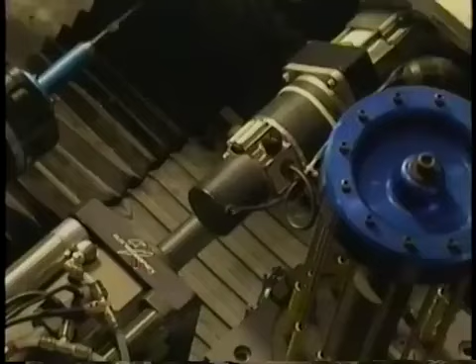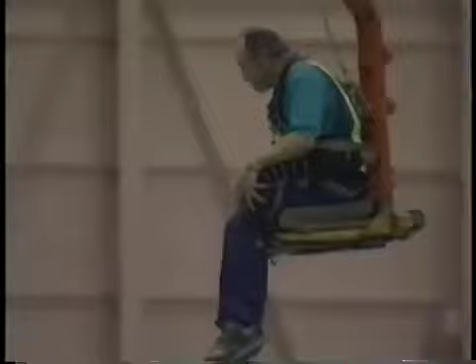It would be one of the most complex machines ever built. It would take 10,000 people and nearly 5 years to build it. It would cost an estimated $5 billion.

Success was anything but certain. The plane would contain more than 4 million parts supplied by contractors around the world.

But would they arrive on time? Miss your first commitment and then things start to go wrong.

And would they work? From a technical point of view, I would not put this back on the airplane if I had a choice.

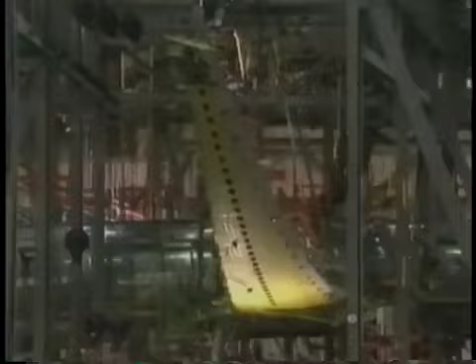Nothing could be left to chance. This would be the most tested airliner in aviation history. Eventually, lives would be at stake.

There's an apprehension anytime you change technology. To make it all work, the company would reinvent itself from the inside out.

And all of this would have to happen at a time when the world's airline industry was in recession. If the 777 were to fail, the company's future was at risk. Success would keep Boeing ahead of the competition for decades to come.

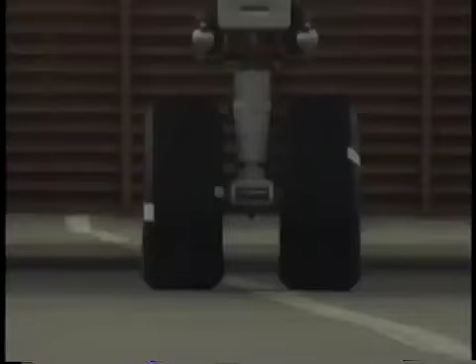This plane would be built to set a new standard for commercial aviation. This is the story of the building of a 21st century jet.

I'm sorry, I thought that was...

300 people are boarding a flight from London to Washington, D.C. It's actually an inaugural flight, although most of these people didn't know it when they bought their tickets. This just happened to be the day we needed to go back to Washington, and the secretary made the flight. I don't think she knew it was the inaugural flight, so it was just pure coincidence.

This is the first commercial flight by United Airlines of a brand new airliner, the Boeing 777. The chances are that anyone who travels to Europe or Asia will sooner or later fly in the 777, as this plane replaces the older 747s on many overseas flights.

It's Boeing's 7th new airliner, and the company has staked its future on it. In economic hard times for the airline industry, Boeing hopes the 777 will keep the company prosperous well into the 21st century. But the investment and the risk are enormous.

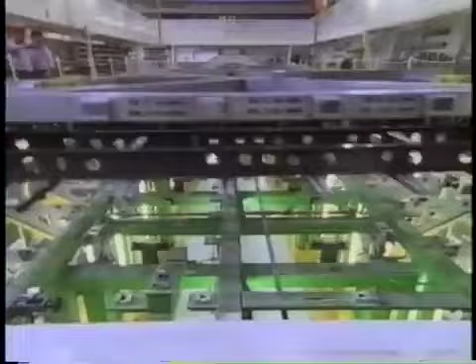For the last 3 years, we've been following the process of designing, manufacturing, and testing the world's largest and newest twin-engine airliner.

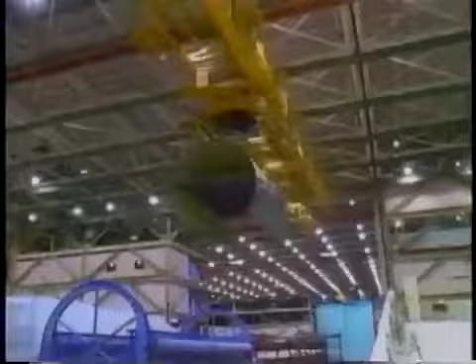It's cost an estimated $5 billion. Boeing needs to sell 200 or so planes at roughly $100 million apiece before the company will consider the plane a success.

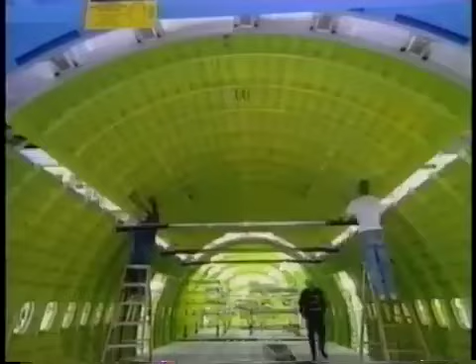Back in mid-1992, Boeing began assembling and training the 10,000-strong team whose excitement and disappointments would punctuate the complex process of plane making.

A key figure in this drama was Alan Mulally, the 777 director of engineering. He had a boyish charisma, a fierce pride in his company, and he was determined that the new plane would succeed. Best airplane company in the world.

But in the time since Boeing had developed its last airliner, the aviation industry had changed. It had become harder to hold on to a share of the market. What's different with the airlines? They have choices. They haven't had so many choices before. All except the 747, Airbus has an airplane that can match every one of the Boeing airplanes.

So they have choices for the first time in history. This new competition had come about because of a gap that opened up in the commercial aviation market. The airlines wanted a long-range plane that was smaller than Boeing's 747, so Boeing's two rivals started manufacturing new planes to fill that gap: Airbus with its A330 and 340, and McDonnell Douglas with the MD-11 and MD-12.

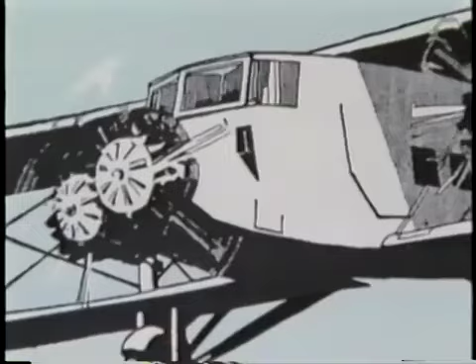To justify the huge investment in the new plane, Boeing needed a launch customer, an airline that would commit to buying a significant number of the new planes in advance.

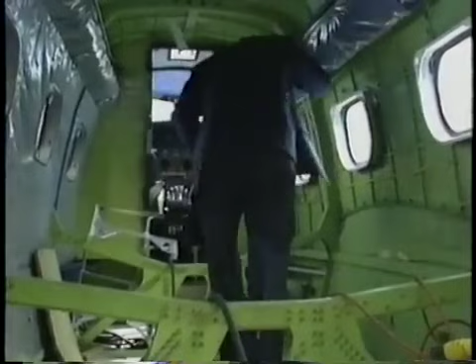They naturally turned to United Airlines. The two companies had been partners in the early days of commercial aviation. This is United's first Boeing airplane, the earliest all-metal transcontinental passenger airliner. The company has since bought more than 1,000 Boeing airplanes.

But the historical relationship between the two companies counted for little when it came time to make the deal. Gordon McKinzie of United: So we went through a rather large evaluation process in 1989 and 1990, where we were looking at 33 combinations of airplanes and engines for our wide-body purchase, and this was just one of the candidates. The 777 was up against the Airbus and the McDonnell Douglas airplanes.

The sales campaign came to a head on the weekend of October 13th, 1990, when all three manufacturers, Boeing, Airbus, and McDonnell Douglas, were summoned to United headquarters in Chicago to make their pitches. Boeing was asked to sign this handwritten piece of paper.

It played a crucial role in the decision, as Alan Mulally would later tell the 777 team. There's a piece of paper that Jim Guyette, who's Executive Vice President of United Airlines, wrote at 2:15 in the morning. He woke up in a cold sweat.

He's going to walk in and see Mr. Wolf, who's the chairman of the board of United. He had the chief financial officer that was voting for Airbus instead of Boeing, and he had to walk in and make his vote: what airplane should United Airlines go with for the next 30 years?

It was a hard-headed and unsentimental business, with each of the three competitors in separate rooms, running in and out of a room full of senior United executives who were trying to make up their minds. An executive named Dick Albrecht led the Boeing sales force.

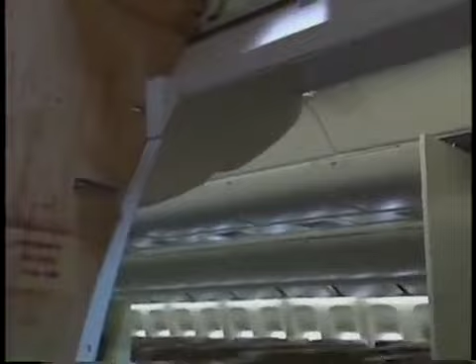But it was the interior of the plane that most interested the customer. To show off the interior layout, Boeing spent hundreds of thousands of dollars on a life-sized mock-up. It would be an essential sales tool. Early on, Lord King, chairman of British Airways, was given a guided tour.

Lord King is shown an important area at the back of the mock-up, called by salesmen the dirty pool, with an emphasis on how the 777 would compare with the competition. All the wide bodies flying today, because what we were after was, you said make it bigger and make it roomier. Well, this is what people are used to flying. Here's the contour, and here's the bins. Here's the 777, the 5 inches larger. You can see the contour, and then the effect of the bin. Okay, all right, let's look at the back.

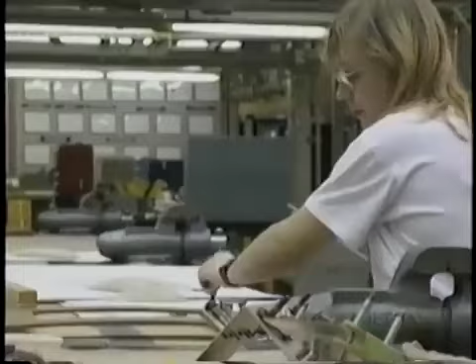In previous Boeing planes, full-scale mock-ups of the aircraft, inside and out, were not just marketing tools. They performed an important role in the design process. With the 747, for example, Boeing built several life-size mock-ups of the whole plane, with every part modeled in detail before the design was finalized. It was the only way the engineers could see whether or not the pieces fit together.

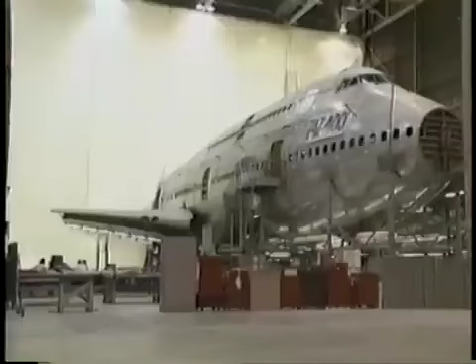Because of the three-dimensional complexity of the plane, a component as first designed often got in the way of the structure or one of the other parts, like these red pipes, which are not meant to go through the yellow duct. With the 777, Boeing wanted to find ways to catch these interferences, as they're called, before the assembly stage.

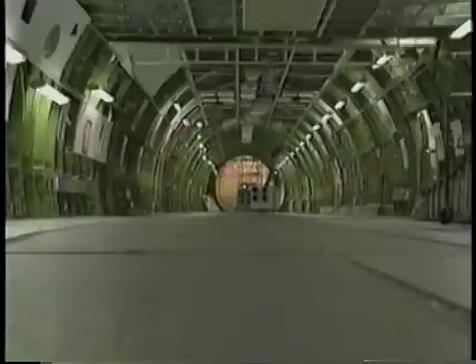You have 5,000 engineers designing the airplane. It's very difficult for those engineers to coordinate with two-dimensional pieces of paper. For a designer who's designing an air conditioning duct to walk over to somebody designing structure and say, here's my duct, how does it match up with your structure, with two-dimensional pictures, is very difficult. So we ended up using the mock-up and, quite honestly, the final assembly line to finish up the integration. It's very costly, and you end up with an airplane that's very difficult to build. It all has to do with visualizing 3 dimensions on a 2-dimensional drawing board.

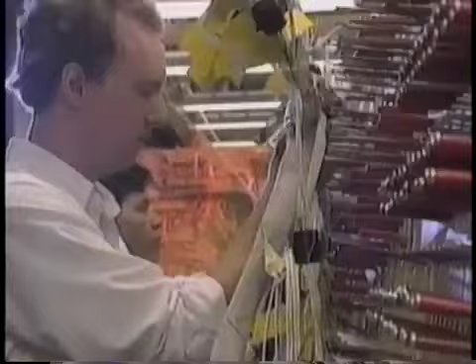One of the trickiest problems was working out the lengths and angles of tubes, pipes, and wires. We would literally, physically thread the systems through that mock-up, and then, in the wire bundle sense, take it out of the mock-up, flatten it on the board, measure it, and that's how we decided how long the wire needed to be. Then you would adjust as necessary, because the airplane, not made of plywood and aluminum, differs from the mock-up. So as you produce those first wire bundles, you make further adjustments to make them fit the real airplane. Hydraulic tube, a very similar situation.

The solution was a secret weapon called CATIA, a computerized design system that would require 8 mainframe computers to run it. Engineers would be able to roam the virtual interior of a plane that didn't yet exist.

As pieces were designed, they appeared in the virtual airplane next to other components, and the team could check to see that they all fit together before they were carved out of metal. So for the first time, the engineering creative process was enabled to think in terms of the way the world is, in terms of 3 dimensions.

Now, computers don't design airplanes. We have not put the knowledge that's in the airplane designer's head into artificial intelligence that balances all these objectives. Someday we'll probably continue to move toward that, but right now, the knowledge to design airplanes is in the designer's head. There would be more than 2,000 computer terminals so that each group of designers could feed their drawings into the main computers.

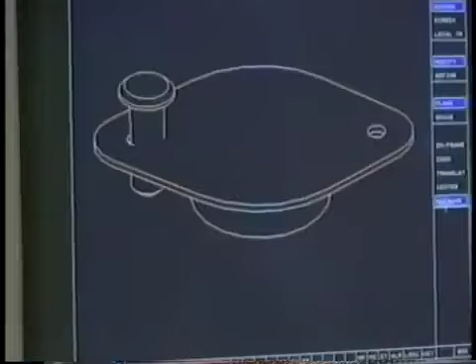In June 1992, the passenger doors team was checking for interferences in the components they had designed. An interference showed up in red. The designer was concerned about two crucial components in the door hinge.

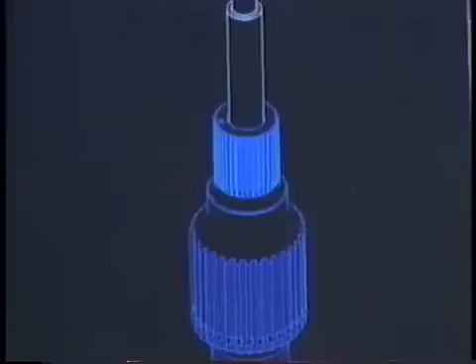This splined part right here, there's a bolt passing through it. It's actually the connection of the door to the door frame, the cutout, and this bolt affects that connection. Somewhere inside there we've broken some law. Now that looks like a real interference.

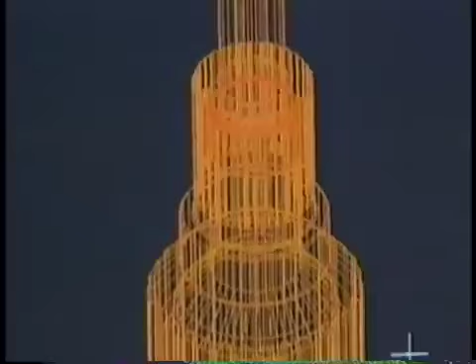This is what happens when you accommodate your stress man's desire that they be intimate. Ah, they interfere for the entire head of that bolt. But the actual amount it interferes, we can really tell by cutting through the two of them and looking at an accurate cut, which doesn't take hardly any time at all.

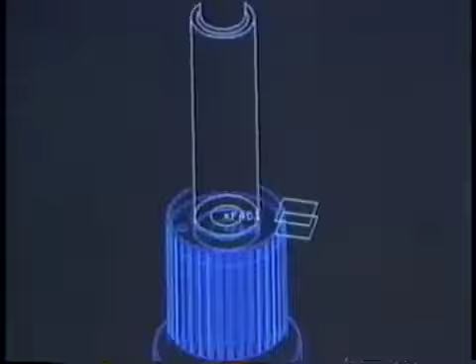Now this, yes, the second circle is just a little bit larger than the first circle, and I do indeed have a little problem here. But it's a very small one. We haven't released any drawings yet.

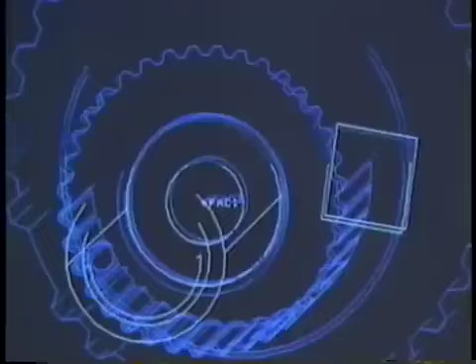Another innovation on the 777 would be a new method of organizing the 10,000 or so people building the plane. On past projects, airplane design had been bedeviled by communication problems between the many different divisions in the company. For the 777, Boeing would create new work groups called Design Build Teams, or DBTs.

They would include people who had never before worked together. I wish I could say that design build teams were one of those wonderful ideas that just leapt forward and you said, aha. In a lot of ways, it is a return to some things that have worked in the past.

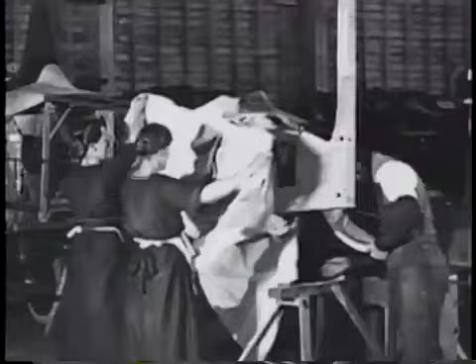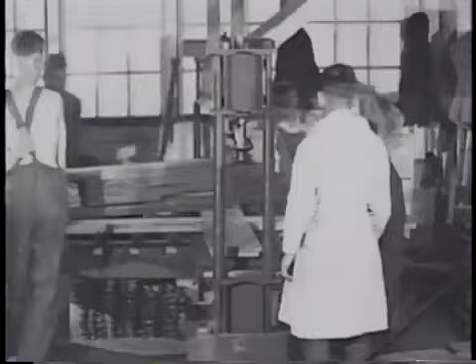That were scale driven. If you go back to the early airplanes that Boeing built, the factory was on the bottom floor, engineering was on the upper floor. Both manufacturing and engineering went back and forth. When there was a problem in the factory, the engineer went down and looked at it and said, well, you better do this. The entire design department was within 50 feet of each other.

As the scale went up, that got harder and harder. And if you're not careful, organizations, just by the way they behave, want to form little enclaves. So structures goes off over here, and air conditioning goes off over there, manufacturing goes over here, planning goes over there, and finance goes over there.

And then one day you turn around and you've discovered there's an us and them attitude. If only they would do this, then our job would be easier, and if only they would do this.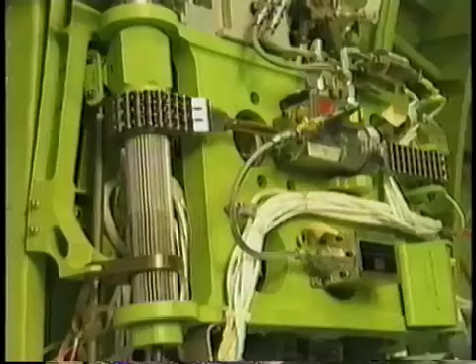The passenger doors were designed by one of over 200 design build teams, each responsible for a major component. Making an airplane door that works involves the complex interaction of geometry, materials, manufacturing, and in-service maintenance. At one point, this team faced a problem that brought up all these factors.

That's a full-size drawing of the two cutouts in the door skin that are located very closely together. Again, our principal concern is making sure that with all of the parts that have to be integrated into this area and the fasteners that have to be put in the skin, do we have enough room to do all of that? And will the assembly be durable and damage tolerant?

The problem involved a metal area of the door skin between the window and the door handle cutout that was uncomfortably narrow. The designers have two questions. How strong a force would produce a crack in this area? And if the metal did crack, what force could enlarge it and lead to the door failing?

They get two different figures from the stress analysis engineers. It would take a force of 27,000 pounds per square inch to crack the metal. But once a crack had formed, a force of 12,000 pounds would be enough to open it up. That's the way we perceive the situation. 12 is the upper limit at which the crack will not grow. And in this area, there's not much room for a crack to grow. We're very tight. I guess the problem, what's still not clear in my mind is, for the identical area under the identical consideration...

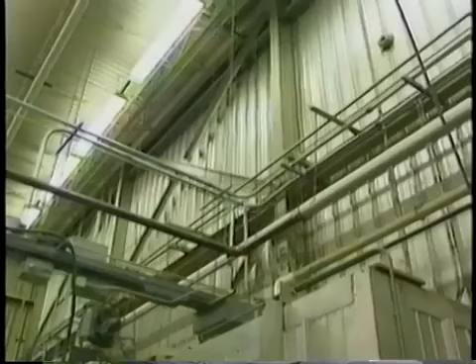In mid-1992, while the team was still designing the door, they built a prototype for a very important cold weather safety test. The engineers wanted to see if the door could be opened in the worst imaginable conditions of icing on the outside of the fuselage.

The first stage of the test involved spraying the door with water all night in a low-temperature chamber until there was a thick layer of ice.

Welcome to the Bahamas.

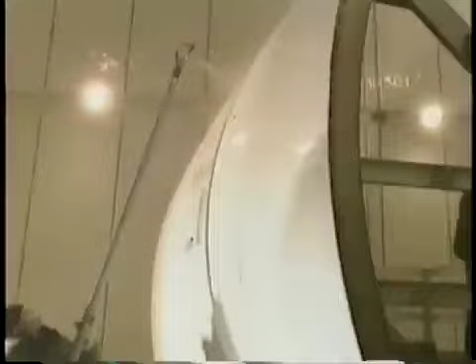But how could a plane ever get into such a state? If a plane lands from a cold flight, minus 65, and comes into an airport where it's about 28 degrees with freezing rain, that rain adheres to the outside of the airplane. We need to make sure we can still open the doors. Our criteria is a quarter inch thick of ice all over the whole airplane, and yet someone with nominal handle force on the inside can still open the door. We consider the ice to be as strong as 100 pounds per square inch to break it. It's a quarter inch thick, with about 200 inches of ice around the door. Factoring in safety factors, that's about 6,000 pounds of lift needed on the door to break all the ice, which has to be achieved with about 50 pounds of handle force on the inside, set up as quickly as we can.

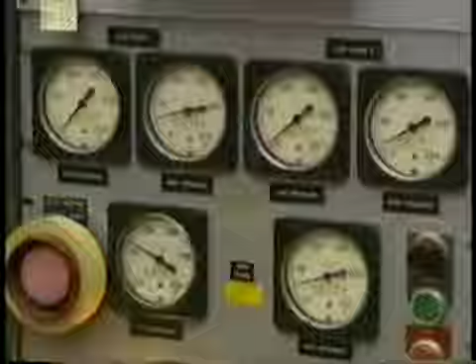The following morning, the door had acquired a thick enough layer of ice to test the mechanism. It's minus 20 in there right now. It was minus 55 in there yesterday when we sprayed the water to make sure it iced up. Considerably colder yesterday. Minus 20 is not so bad.

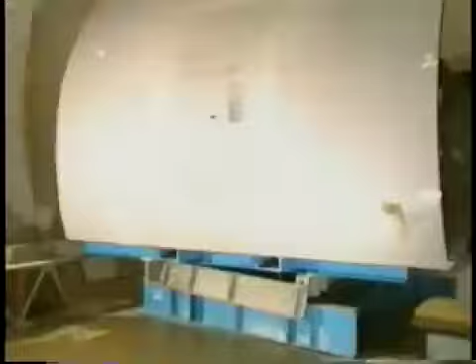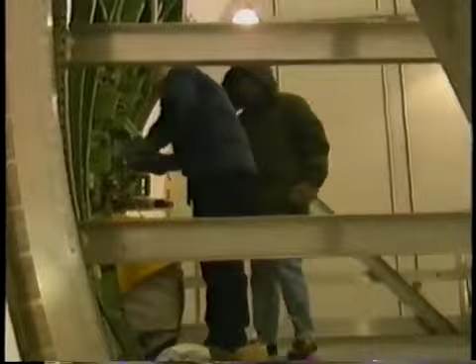This test had never been done before on this door design. If it didn't work, the engineers would have to redesign the complicated opening mechanism inside the door.

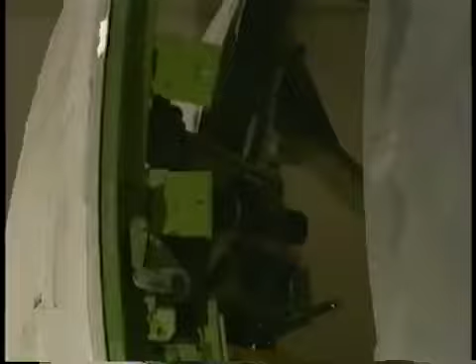Now, the girt bar was right against here? Right, this is all fabric. That's great, it'll show up automatically, sir. Boy, it's nice. This is a big key test, and it worked great. Feel real good about it. Right.

Another part of the plane being tested long before the 777 existed was the flight control system. Boeing equipped one of its smaller planes, a 757, with a prototype of a brand new system that would be used in the 777. They had to test it in flight.

Right now I'm holding a lot of column force. These tests came after many months of testing in simulators on the ground. The new system was called fly-by-wire. I'll go to 10,000 feet and about 250 knots, and we'll stop there and do some evaluation.

Fly-by-wire is an unfortunate term. Probably electronic flight control system is as close as you can come to the real definition. It's simply the idea that we use electrical wires rather than mechanical cables to transfer signals from the front end to the back end of the airplane.

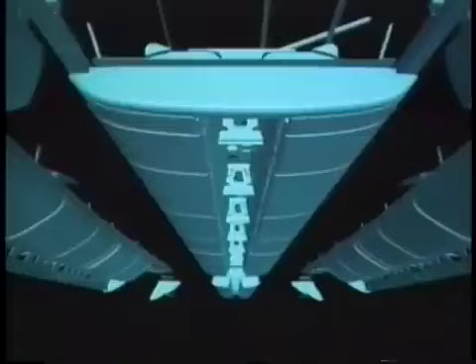Boeing was also proud of its new overhead bins, which seemed to demand a technology and a jargon all their own. We have 3 sizes of bins, and those bins can be shuffled to any arrangement to sneak up to outboard monuments - we call them monuments, labs, closets, galleys, etc. But more importantly, in the past each one of those monuments was very static and had to be tied straight back to structure. In this design, this fore and aft member allows that unit to be translated fore and aft in the cabin on 1-inch centers, anywhere in the airplane, in prescribed flex zones that allow load path capability in the overhead rail. The Japanese were expected to be one of the largest purchasers of the 777, but would be among the shortest in stature.

Nichols finds a diplomatic way to refer to this fact in describing the design process.

This is an issue with our customers, more so with our Pacific Rim customers than for instance European customers or American carriers. It's the height, it's the ergonomics of the latch, and some of them feel it's a bit too high. On a pivot bin, it must be this high to reach the latch, but once it opens, the access to the bin is more than acceptable and appropriate in terms of a shelf bin. Where the shelf bin remains static, you hit a latch that's quite low, and the door swings up, and now I'm reaching up here to grab the door. So the latch handle - though our customers have expressed some concern, they've all been through the mock-up, and they understand our design. To physically move that would demand a lot of effort, and believe me, we can do anything, but we've pounded our stake in the ground and believe ergonomically and demographically this is the right latch.

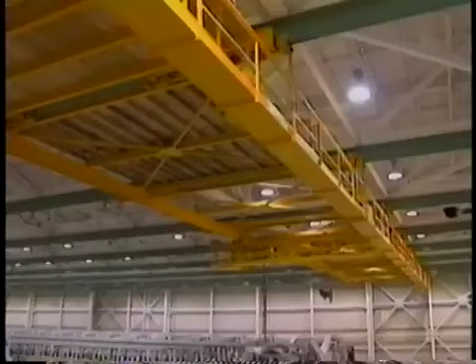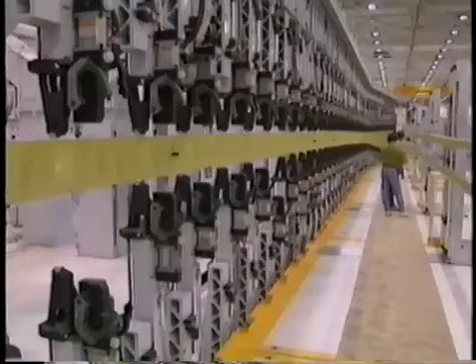It would begin as the first component of Boeing's brand new aircraft, a wing spar, began assembly on a giant automated riveting tool. This piece was a long, thin metal spar that would run the full length of the wing. Over the next few months, the rest of the wing would be built up around it.

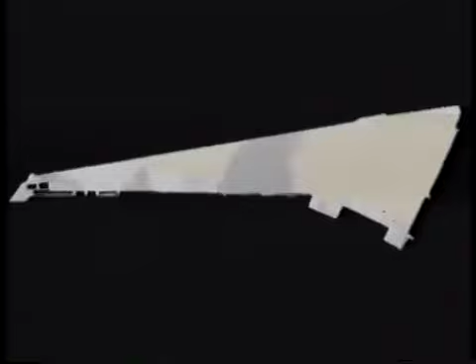Sylvia Lefferer had the informal honor of initiating the process as she began her job of sealing the edges of the 100-foot-long piece before it was fastened to other components. It was a simple process involving an injection gun and compressed air.

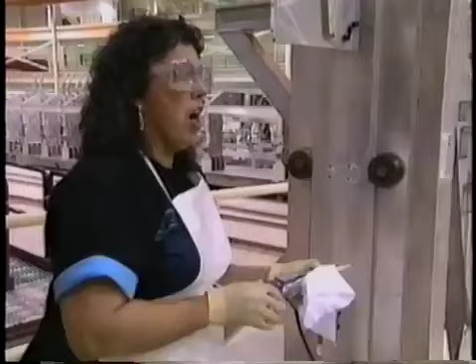Something's wrong - at least it was supposed to be. We got a problem, we got no air right now, so we got to try to get that hooked back up. Well, it did for a minute. Maybe it just bled out.

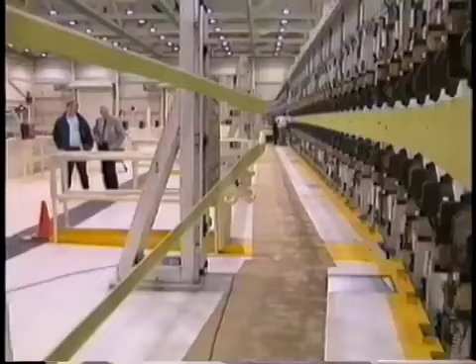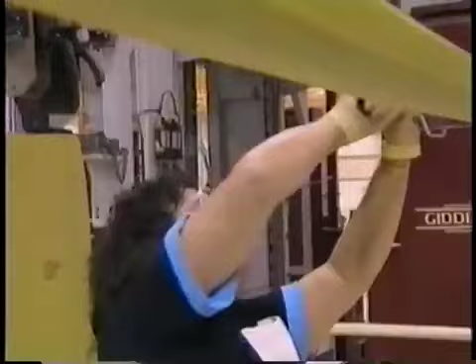Once the air started flowing, she smeared a layer of gray sealant along the piece. After years of doing this on other planes, she could produce a layer of constant thickness the entire length of the piece.

The work had to be checked by a quality control inspector. Too thick a layer would add weight to the plane. Too thin and it wouldn't seal properly or prevent corrosion.

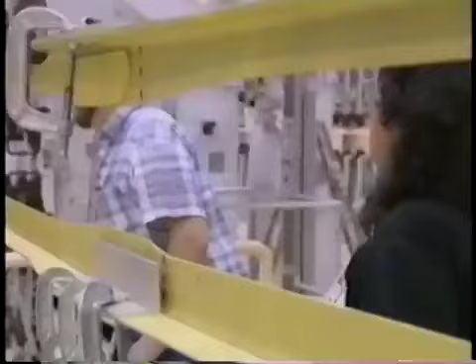That looks good, thank you. Sylvia's work passed inspection and the pieces were moved into contact with another component ready for fastening.

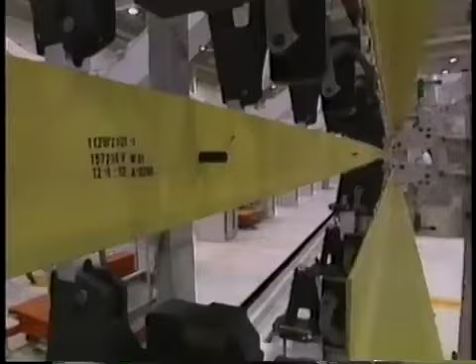Then there was another small problem. The upper piece of the spar was out of position by a 50th of an inch. The lower chord is at its locator inboard. The upper chord is 20 thou outboard of its locator.

You mean we just want to index up right there, right? That's correct. Couldn't we just take a big C-clamp and tap it out? You might as well use the provision of the tool, what it was built to do. Let's go ahead, to move this way? Yeah, okay, I want to see it.

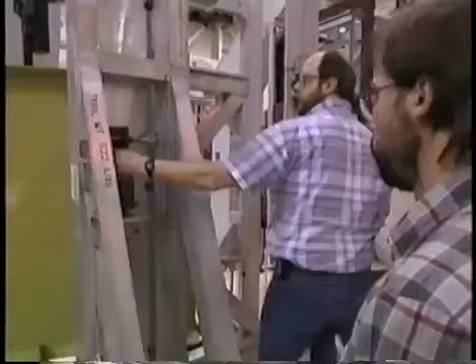I haven't seen it. That's what this ratchet handle does here. See, you clamp this here, and then just hopefully move this upper chord inboard. You ready? Ready? Okay, good. Now watch.

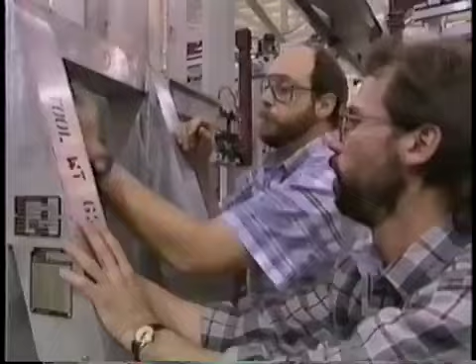Over in the 777 team's brand new office building, Alan Mulally arrived for work. It was just a few days after Christmas. Mulally hadn't had much of a holiday. But I came in on all but 2 days. But it was kind of a nice time.

It was almost like a time to reflect on the past year and think about the priorities for '93. We had quite a few people working, especially in engineering, operations and planning, and tooling, where they were supporting the first parts of assembly. So I talked to quite a few of the structures engineers and the planners and the toolers associated with structure, just to get a feeling for how they saw it, what their problems were, and challenges and stuff.

Although the team had started assembling the wing, the design of the plane was not finished. The way we lay out the program is that we stretch that process over nearly 2 years. So what determines what parts are going to be designed is the sequence of when it's going to be assembled. So the actual designing of all these parts is spread over 2 years. So even though we're seeing parts being assembled for the front spar, those are the parts that were designed first, because those are the parts that need to be built first. But right now all the payloads area, like all of the bins and the seat tracks and stuff, they're just being designed now because they'll go into the airplane later in the sequence.

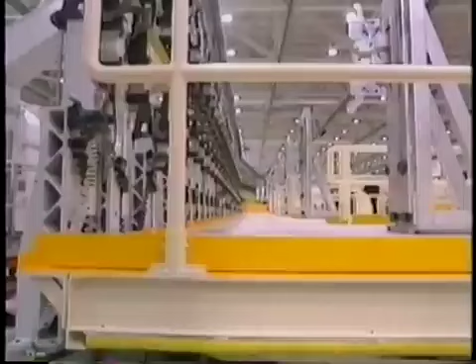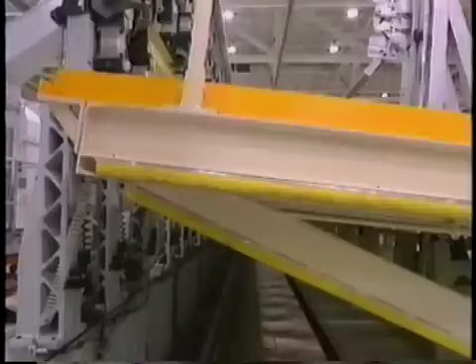The beginning of assembly was a significant milestone in the life of the 777. But now there were only 18 months till a piece of metal in this tool would fly, along with 4 million other components, on the airplane's first flight.

And as Mulally looked ahead, he and his team faced an ongoing recession in the aviation industry. How would this affect the fortunes of Boeing's new plane?

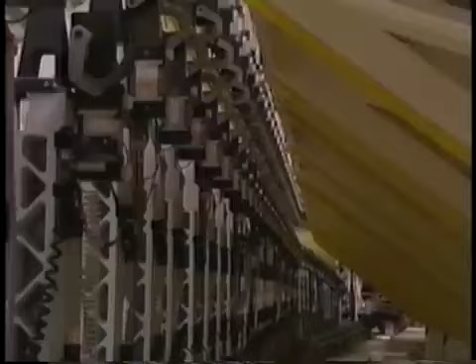It's so important for us that we absolutely not let the current events affect our intensity on getting this program done, because this is such a long-term business and these projects are big and they're made for the future, that we just can't let the anxiousness and the ambiguity of today's environment in any way slow us down. And so we talk about it. We talk about it openly. We talk about every cancellation. We talk about every airline that gets in trouble, every airline that has to go into Chapter 11 bankruptcy, and what it means to Boeing. And we talk about what's happening to Airbus the same way and what it means to us. And it's okay, it's really important that we talk about it. And then we move on to what our real job is, and that is stay focused on developing the airplane for the future. And that's our strength to keep going.

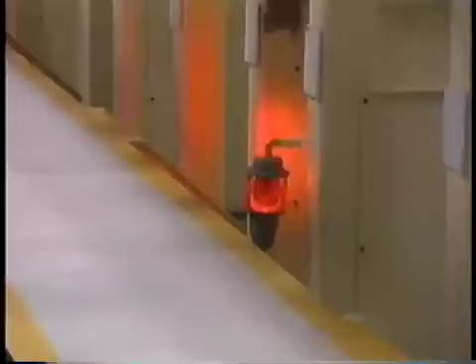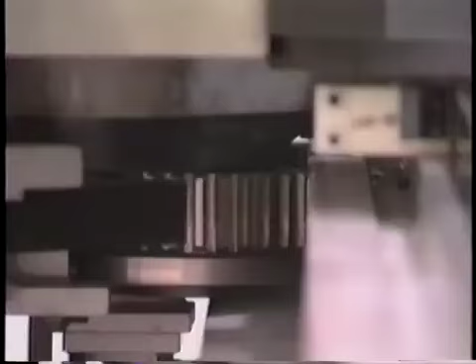But it is worrisome. The team's morale was at a low point. But there was no stopping the plane-making machine that had lumbered into action. They were committed to building the 777 whatever the challenges, and there were certain to be more of those in the months ahead.